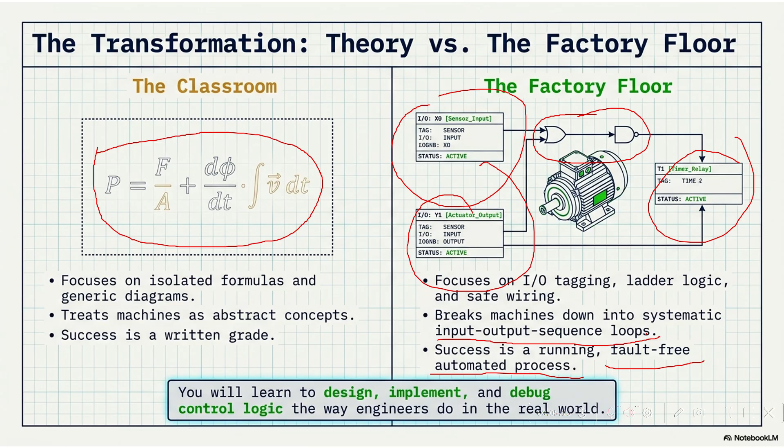So what are all the fields this automation comes into? I have tried to limit some of the applications in the initial classes. As soon as we progress, we are going to discuss more different case studies, different domains where automation concepts come in, where students can find their fit in the field of industrial automation.

So, conveyor systems. In the conveyor system, the main objective here is to transfer the object. So here it does object detection, motor delays, stop, start, and packaging line routing, sequential packing, right? So for this I need inputs, outputs, motor controllers, timers.

So how we can understand? If the status shows green, it is running, it is active also sensor. Red color indicates it's stopped, somewhere there is an error. So this is one of the case studies.

Next, automated machines like CNC machines, robots, how it works, water and process plants, how the water level sensor will work in pumps, and whether human intervention is needed or not. Those things we are going to learn here.

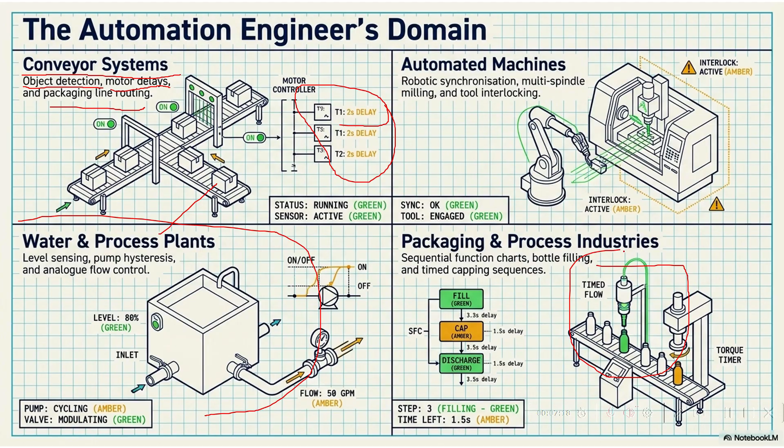And why automation is important in this category? I told you with the case studies in the previous slide. Now, if you understand every case, we need certain common steps. If you want to automate, even if you don't know how to automate it, that is fine, but you should know certain common things. First is understand the machine.

Define the purpose in your own language. What does that mean? You should know in your brain how to automate it. Before that, understand the basic machine.

Next, what are all the physical attributes? What are all the theoretical attributes required to understand the machine, run the machine, and control the machine? That is, identify input and output devices - what sensors we are using, or motor type, and assign PLC registers or addresses.

Next, on what sequence it should work. You are basically not doing the sequence, but if you know how to make a sequence, it is definitely going to add an advantage. Next, convert it into a ladder diagram.

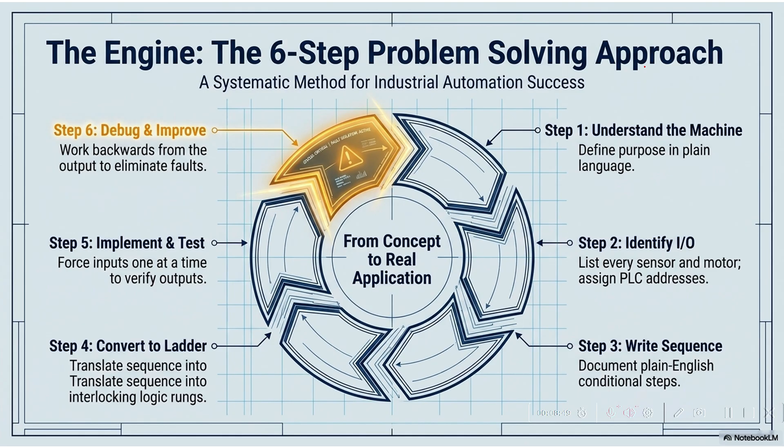Translate the sequence into different steps. Usually we call them in a PLC system as the rungs - that I'm going to discuss later. Then implement, test, run, check the results. If there are any problems, debug it, rerun, rewrite, then finally get the desired output.

So physically, in earlier automation systems we used a small switch, a motor works, it runs the conveyor belt, does something. Later we interfaced with computers. In present day we are going to interface with digital control. So definitely how PLC works with different logic systems is going to be helpful for future industries or present industries also.

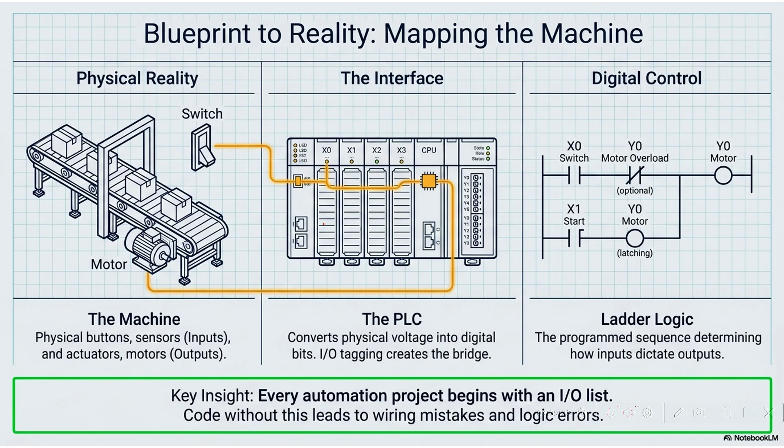So how the basic control helps in understanding the assembly line. Assembly line is very simple here. First, we have to understand what is basic control.

Later, how we can add that basic control with different timing mechanisms - that will become another set of case studies for the same assembly line. Next, you are going to add a sequence - that is another set of curriculum, another learning category. Next comes the final product. So if you know these three basic and intermediate steps, this is going to be the final study.

So one assembly line gives you a lot of options to learn PLCs. Each and every category, we can do many more practical studies.

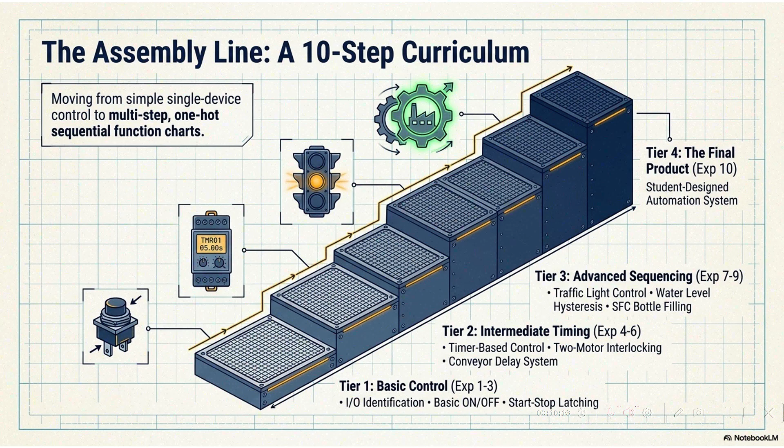So here, earlier there was a switch, now it is an input, and in the input also there are two types - normally open and normally closed. Normally open is usually used to make the contact, normally closed is usually used to break the contact. Please understand this is going to be very interesting as well as a safe approach towards learning how PLC works.

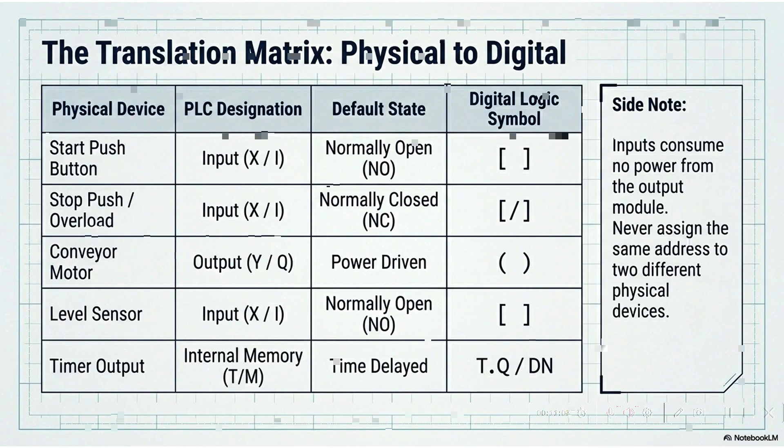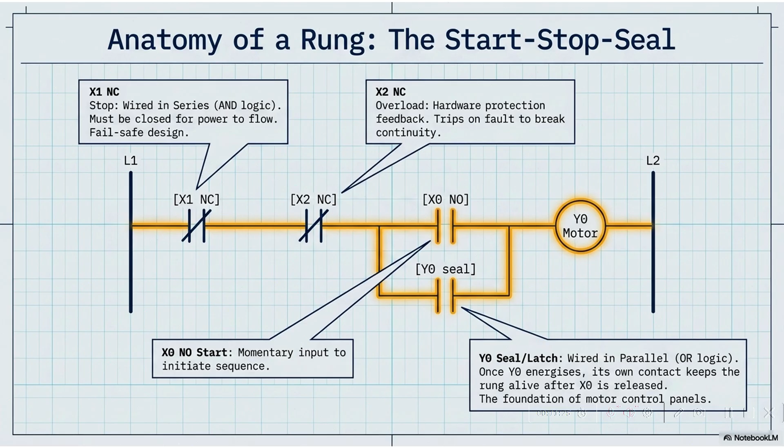So timing, delay, sequence - whatever we saw in the previous slide regarding the assembly line, everything comes here. Why timing is required, why delay is required, why sequence is required, and if one of these fails, what happens? I will give you a very good case study that is going to be worked out in the Mangalore region regarding this, showing why sequence is important.

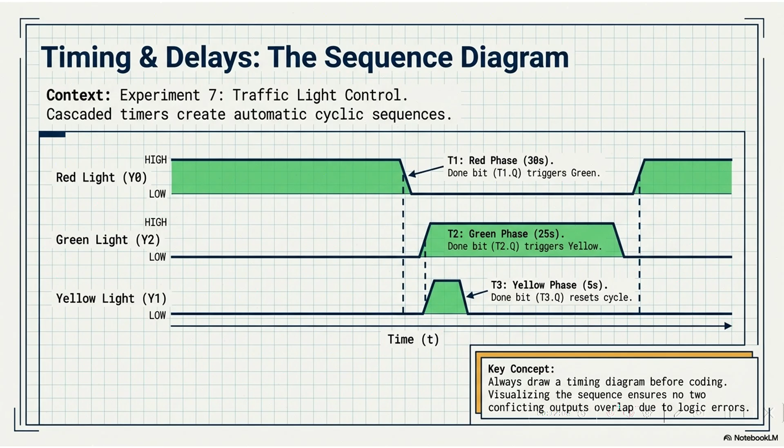So if any student can probably give a better solution, we can definitely work on societal problems. This is another type of case study. Each case study I'm going to cover with practical exposure in the coming videos. Sequencing again comes into picture.